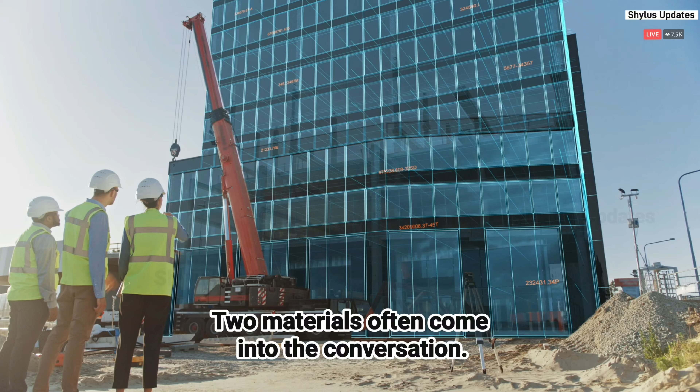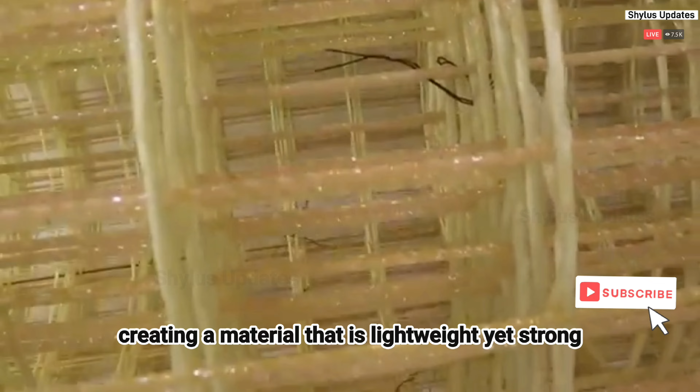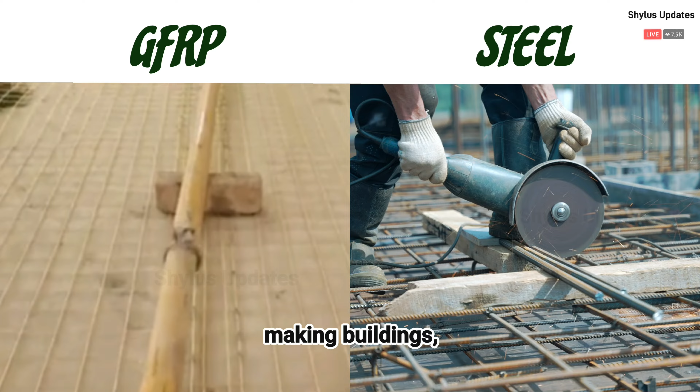When we talk about building strong structures, two materials often come into the conversation: GFRP, glass fiber reinforced polymer, and steel rebar. GFRP rebar is made by combining glass fibers with a polymer resin, creating a material that is lightweight yet strong. Steel rebar, on the other hand, is a solid bar of steel. Both are used to reinforce concrete, making buildings, bridges, and roads last longer.

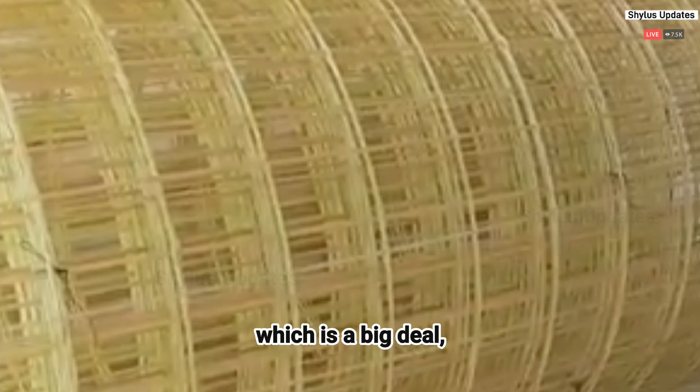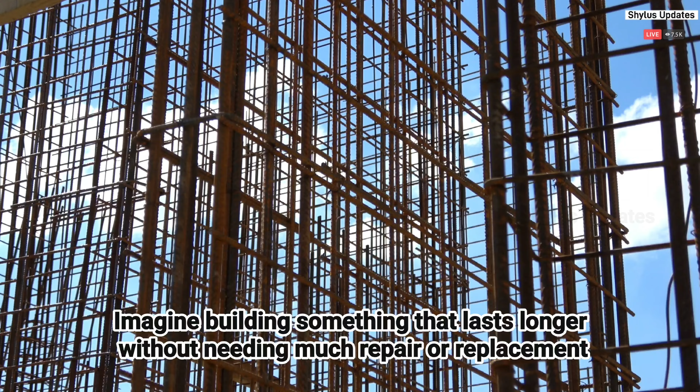Now, you might wonder, why use GFRP when steel has been the go-to for decades? First off, it doesn't rust or corrode like steel, which is a big deal considering how corrosion can weaken structures and hike up maintenance costs. Also, GFRP is surprisingly strong relative to its weight, allowing for easier handling and transport, a boon in reducing labor costs. Imagine building something that lasts longer without needing much repair or replacement.

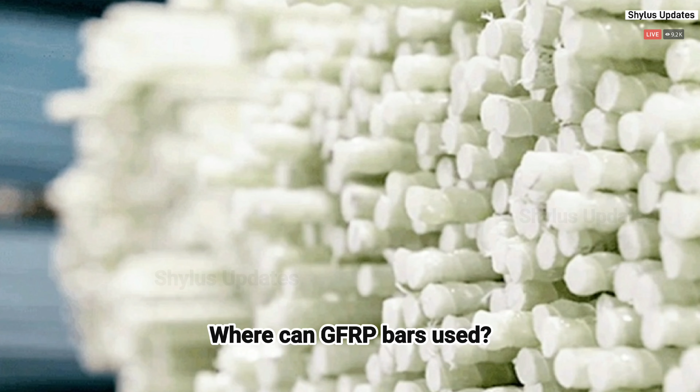That's what GFRP promises. By the end of this, you'll see that though steel has served us well, the future might just belong to GFRP rebar in the construction world.

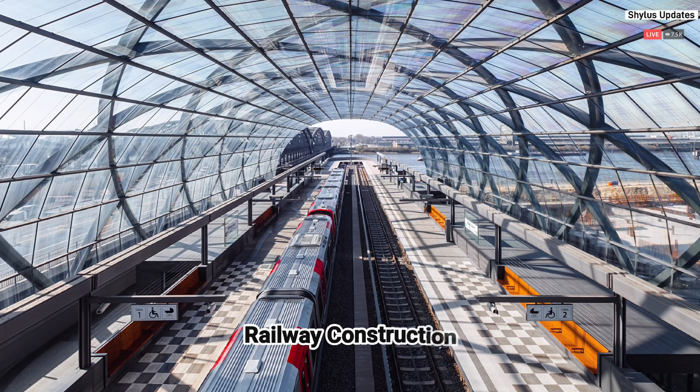Where can GFRP bars be used? Corrosion-prone environments. Roads. Airports. Metro rail. Swimming pools. Underground water tanks. Railway construction. Drainage structures.

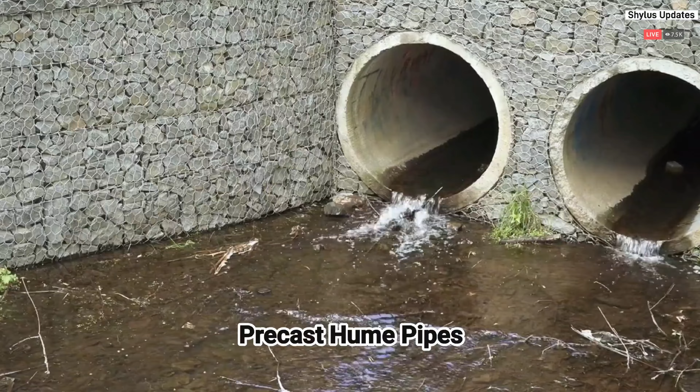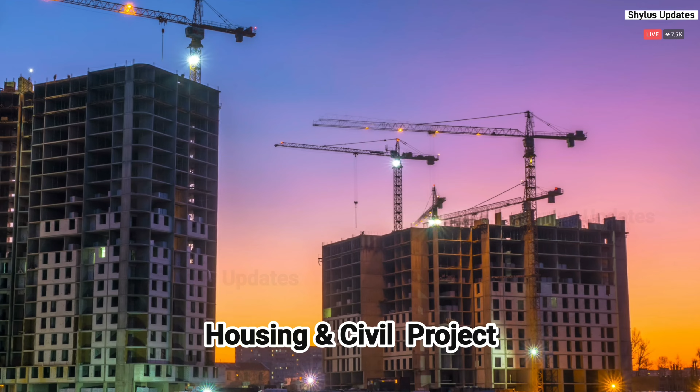Industrial projects. Football grounds. Bridge repair. Precast hume pipes. Water tanks. Concrete walls. Housing and civil projects.

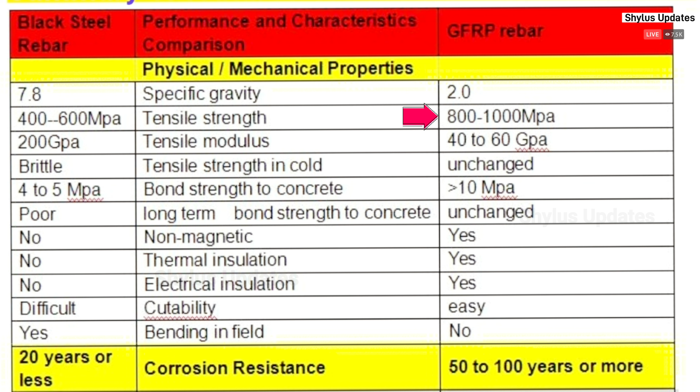Comparison between steel bars and GFRP bars. Specific gravity of steel bar is 7.8. Specific gravity of GFRP bar is 2.0. Tensile strength of steel bar is 400 to 600 MPa. Tensile strength of GFRP bar is 800 to 1000 MPa. Tensile modulus of steel bar is 200 GPa. Tensile modulus of GFRP bar is 40 to 60 GPa.

Tensile strength in cold for steel bar is brittle. Tensile strength in cold for GFRP bar is unchanged. Bond strength to concrete for steel bar is 4 to 5 MPa. Bond strength to concrete for GFRP bar is greater than 10 MPa. Long-term bond strength to concrete for steel bar is poor. Long-term bond strength to concrete for GFRP bar is unchanged.

Steel bar doesn't have non-magnetic property. GFRP bar has non-magnetic property. Steel bar doesn't have thermal insulation property. GFRP bar has thermal insulation property. Steel bar doesn't have electrical insulation property. GFRP bar has electrical insulation property.

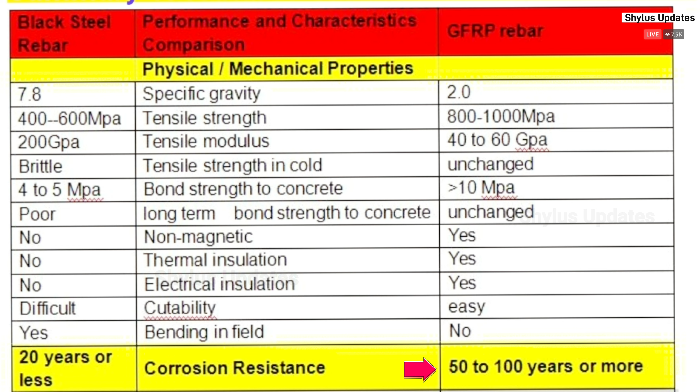Cutability is difficult in steel bars. Cutability is easy in GFRP bars. Steel bar bending can be done in field. GFRP bar bending cannot be done in field. Steel bar's corrosion resistance is only for 20 years or less, whereas GFRP corrosion resistance lasts for 50 to 100 years or more than 100 years.

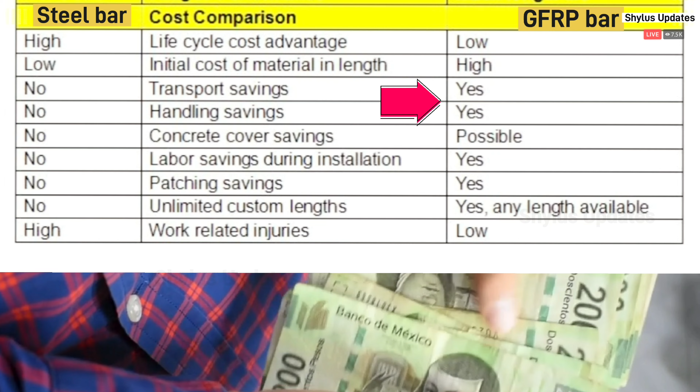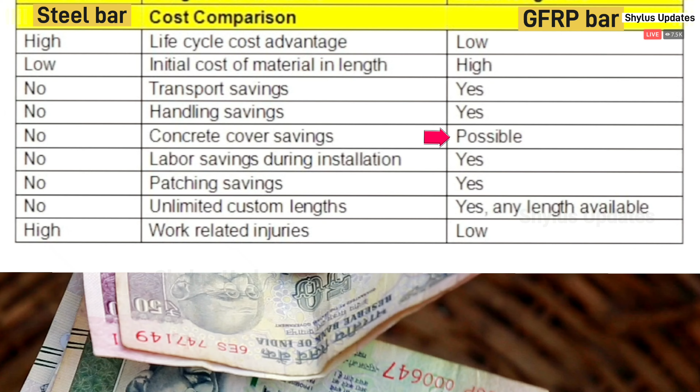Now let's see the cost comparison between steel bar and GFRP bar. Life cycle cost advantage is high in steel bars, whereas life cycle cost advantage is low in GFRP bars. Initial cost of material is low in case of steel bars, whereas initial cost of material in length is high in case of GFRP bars. No transport savings and handling savings in steel bars, whereas transport savings and handling savings is there in case of GFRP bars.

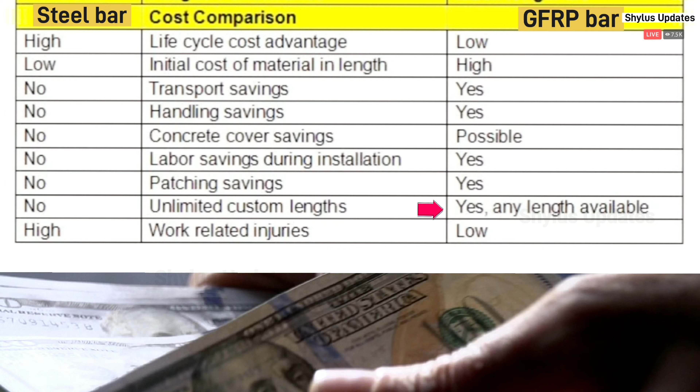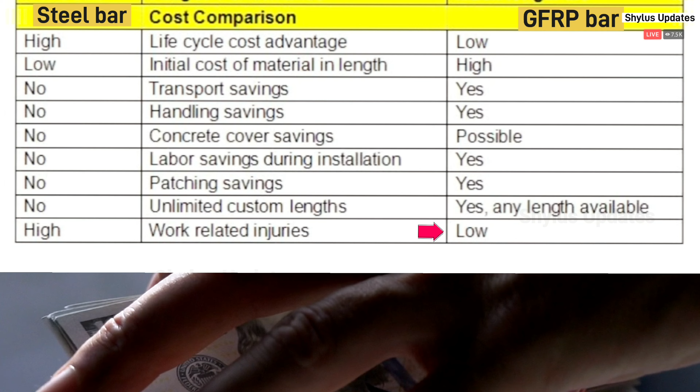No concrete cover savings in case of steel bars. Concrete cover savings is possible in case of GFRP bars. No labor savings during installation in case of steel bar, whereas labor savings is possible during installation in case of GFRP bar. No patching savings in steel bars. Patching savings can be done in case of GFRP bars. No unlimited custom length in steel bar. Any length available in case of GFRP bar. Work-related injuries are high in case of steel rebars, whereas work-related injuries are low in case of GFRP bars.

Next, let us see the benefits of using GFRP bars. Firstly, GFRP bar is stronger than steel bars. GFRP bars are 2 times stronger than steel due to their unique composition and properties. 30% savings as compared to TMT bars. GFRP bars can offer cost savings of up to 30% when compared to traditional TMT bars, making them a cost-effective alternative. Rust-proof. Unlike steel bars, GFRP bars are rust-proof, ensuring a longer lifespan and minimizing maintenance needs.

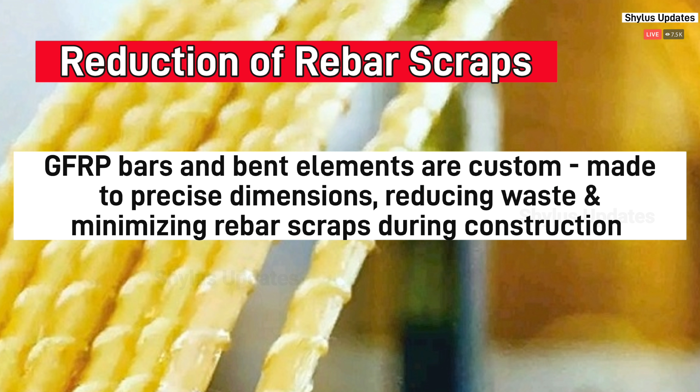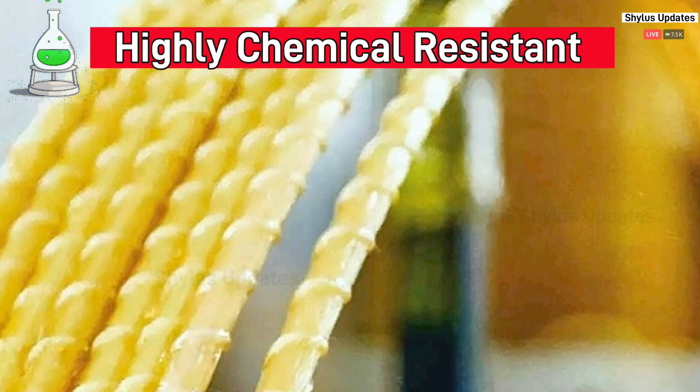Reduction of rebar scraps. GFRP bars and bent elements are custom-made to precise dimensions, reducing waste and minimizing rebar scraps during construction. Fire resistance. GFRP bars are considered to be fire resistant, as they don't burn directly and the structures are sustainable during fire. Highly chemical resistant. GFRP bars are highly resistant to chemical corrosion, making them ideal for use in aggressive environments or marine structures.

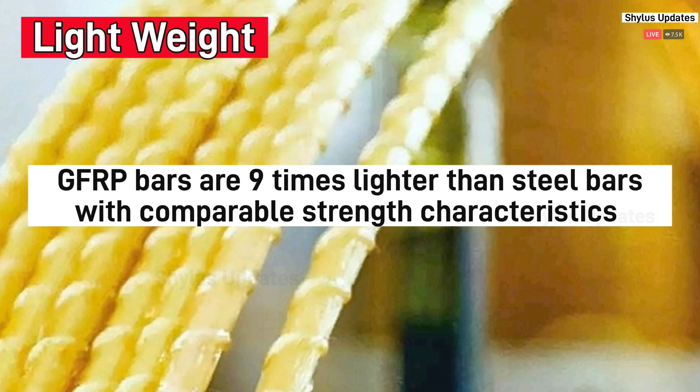High corrosion resistance. GFRP bars are corrosion resistant, which enables engineers to build durable concrete structures in chloride-rich environments. Their long-term performance in highly corrosive environments has caught public attention worldwide. Lightweight. GFRP bars are 9 times lighter than steel bars, with comparable strength characteristics. High earthquake resistance. GFRP bars have 20 times the fatigue resistance of steel, making GFRP more durable under cyclic loading of high intensity, which makes rebars workable during earthquakes.

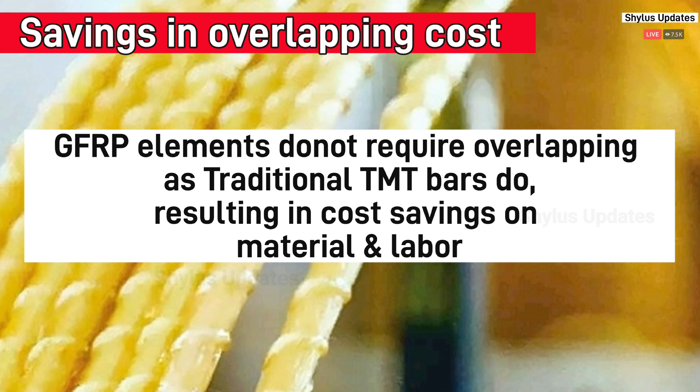Easy installation. GFRP bars can be cut from the bay of any given length, fastened with plastic clips or just a binding wire. Custom length. Unlike steel bars, GFRP bars can be provided in custom length, which can help in reducing cost, as no overlapping is required. Hence, time and labor is saved. Saving in overlapping cost. GFRP elements do not require overlapping, as traditional TMT bars do, resulting in cost savings on material and labor. Easy transportation and storage. GFRP bars can be folded into coils, which allows you to use even cars for transportation, and costs could be saved significantly at the same time.

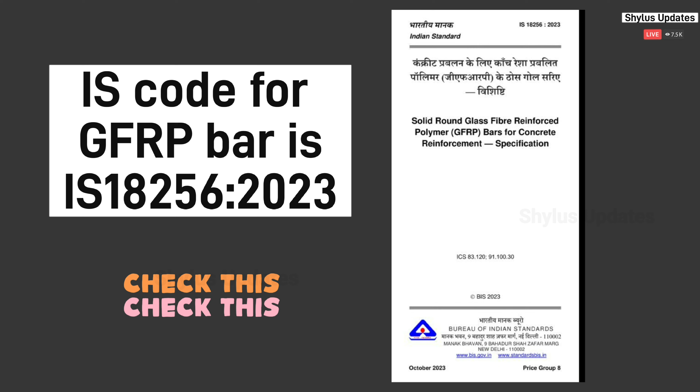IS code for GFRP bar is IS 18256:2023. This document is the Indian standard for GFRP bars used to reinforce concrete. Second code book to refer about GFRP bars is IRC 137.

Bond between GFRP bar and concrete. In code book it is given that the bond of GFRP bars is a resin-dominated mechanism and relies on the transfer of shear and transverse forces at the interface between bar and concrete and between individual fibers within the bar. The bond strength of GFRP bars is 10 to 20 MPa.

Next one is compressive strength. The compressive strength of GFRP bars can range from 300 to 600 MPa. Flexural strength is 1000 to 1500 MPa. GFRP has permissible elongation of about 4.44%.

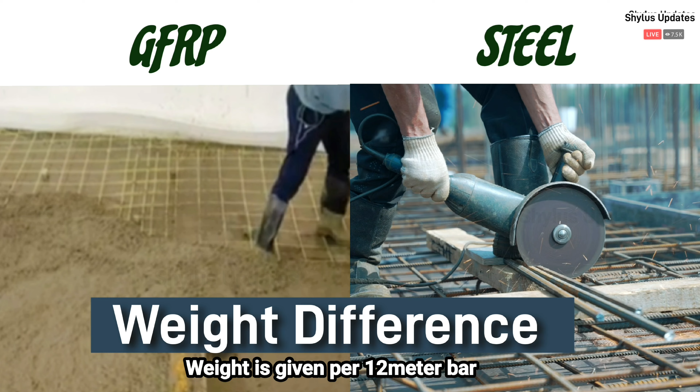Next, let us see about the weight difference between steel bar and GFRP bar. Weight is given per 12-meter bar. Weight of 6 mm dia steel bar is 2.75 kg. Weight of 4.5 mm dia GFRP bar is 0.46 kg. Weight of 8 mm dia steel bar is 4.74 kg. Weight of 6 mm dia GFRP bar is 0.57 kg. Weight of 10 mm dia steel bar is 7.40 kg. Weight of 7 mm dia GFRP bar is 0.94 kg.

Weight of 12 mm dia steel bar is 10.65 kg. Weight of 8 mm dia GFRP bar is 1.23 kg. Weight of 14 mm dia steel bar is 14.52 kg. Weight of 10 mm dia GFRP bar is 1.65 kg. Weight of 16 mm dia steel bar is 18.93 kg. Weight of 12 mm dia GFRP bar is 2.48 kg. Weight of 18 mm dia steel bar is 24.00 kg. Weight of 14 mm dia GFRP bar is 3.24 kg.

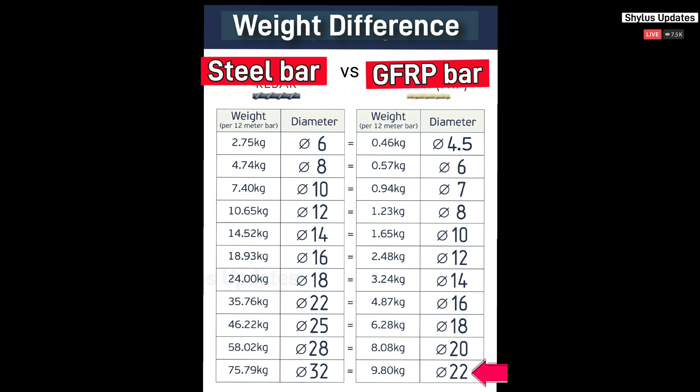Weight of 22 mm dia steel bar is 35.76 kg. Weight of 16 mm dia GFRP bar is 4.87 kg. Weight of 25 mm dia steel bar is 46.22 kg. Weight of 18 mm dia GFRP bar is 6.28 kg. Weight of 28 mm dia steel bar is 58.02 kg. Weight of 20 mm dia GFRP bar is 8.08 kg. Weight of 32 mm dia steel bar is 75.79 kg. Weight of 22 mm dia GFRP bar is 9.80 kg.

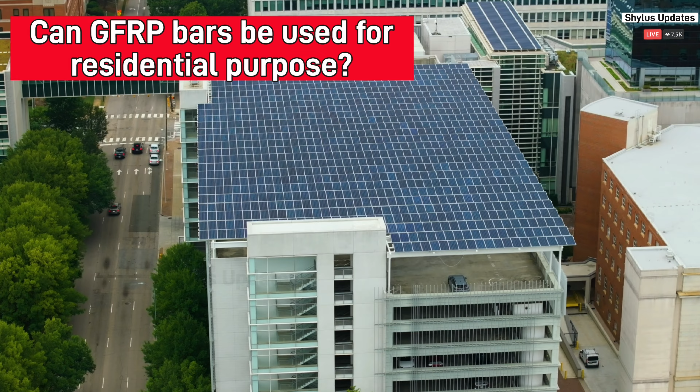Is GFRP cheaper than steel? GFRP is a cost-effective way. It eliminates fundamental and expensive repair problems created by steel reinforcement. Maintain cosmetically attractive structures over time, that is less cracking and ugly rust staining, resulting in higher property resale value. Can GFRP bars be used for residential purpose? Yes, it can be used in residential buildings. It can be used up to a 15-story building level.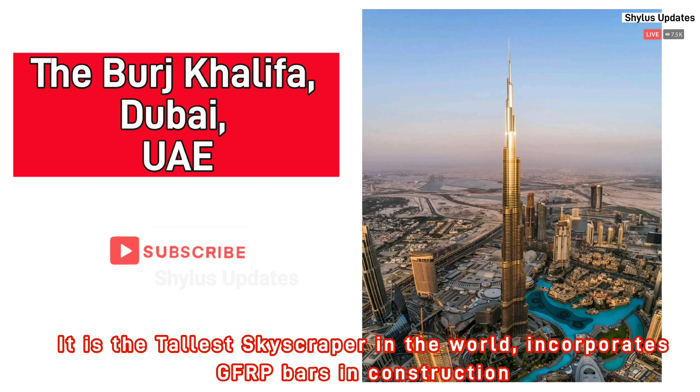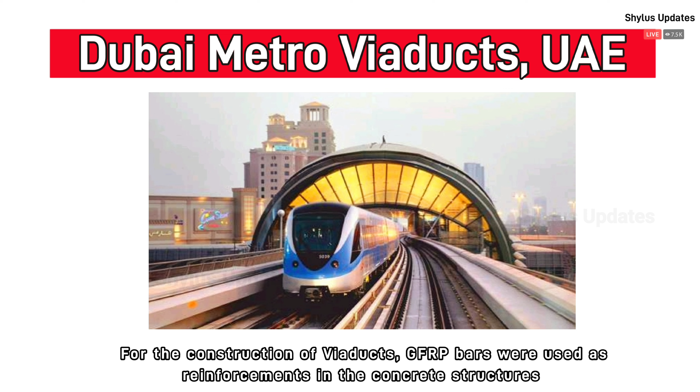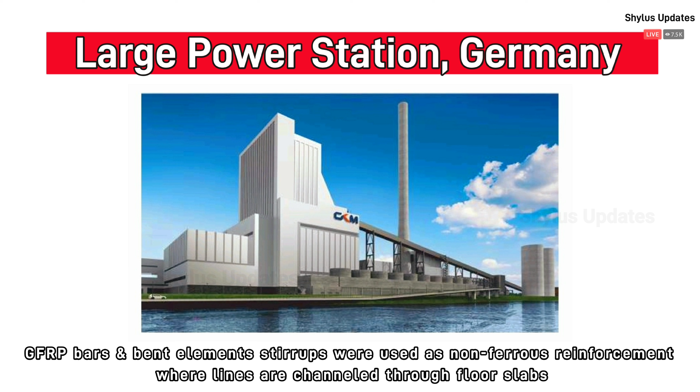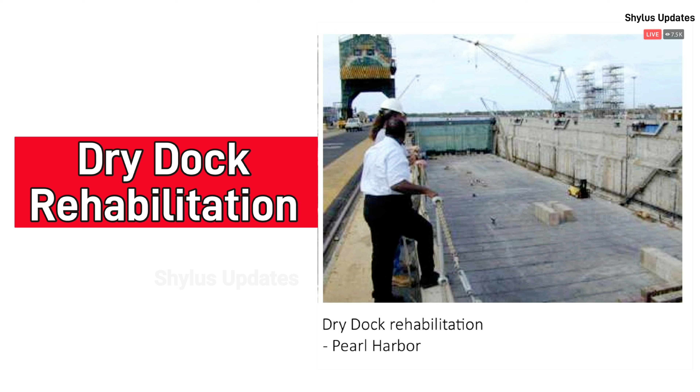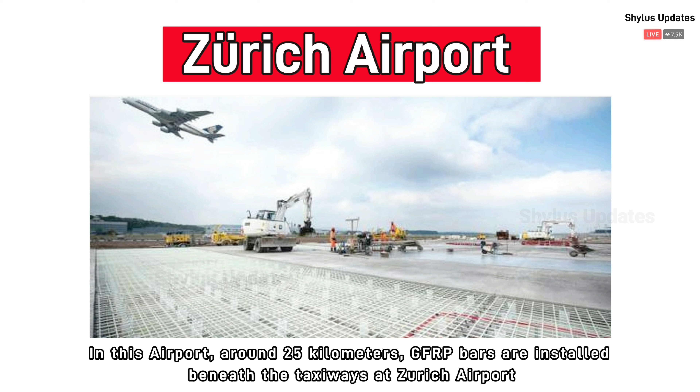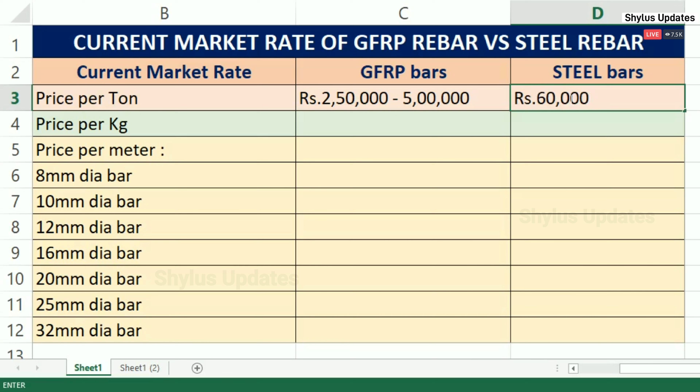Next we are going to see about the current market rate of GFRP bars and steel bars. Let's see the price difference. I have given an Excel sheet for your best understanding. GFRP bars price per ton is from 2,50,000 rupees to 5 lakhs. Steel bars price per ton is from 60,000 rupees to 80,000. GFRP bars price per kg is from 150 rupees to 300. Steel bars price per kg is from 70 rupees to 90. 8 mm dia GFRP bar is from 60 rupees to 80 per meter. 8 mm dia steel bar is from 15 rupees to 25 per meter.

10 mm dia GFRP bar is from 80 rupees to 100 per meter. 10 mm dia steel bar is from 25 rupees to 35 per meter. 12 mm dia GFRP bar is from 100 rupees to 120 per meter. 12 mm dia steel bar is from 30 rupees to 45 per meter. 16 mm dia GFRP bar is from 120 rupees to 140 per meter. 16 mm dia steel bar is from 50 rupees to 70 per meter. 20 mm dia GFRP bar is from 140 rupees to 160 per meter. 20 mm dia steel bar is from 70 rupees to 90 per meter.

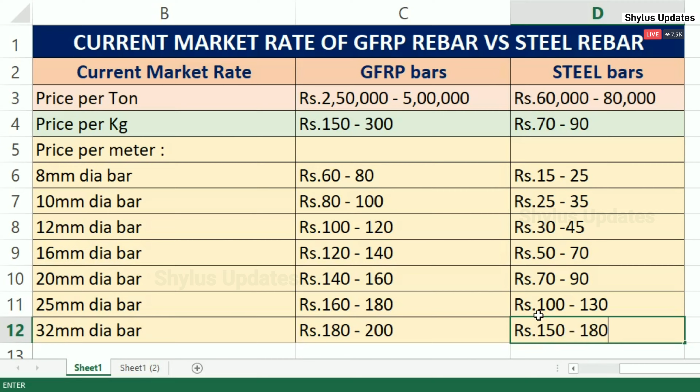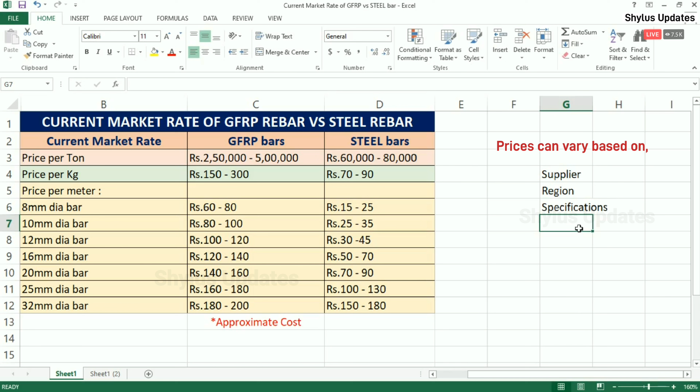25 mm dia GFRP bar is from 160 rupees to 180 per meter. 25 mm dia steel bar is from 100 rupees to 130 per meter. 32 mm dia GFRP bar is from 180 rupees to 200 per meter. 32 mm dia steel bar is from 150 rupees to 180 per meter. Prices given in this video are approximate costs. Prices can vary based on the supplier, region, specifications and market conditions.